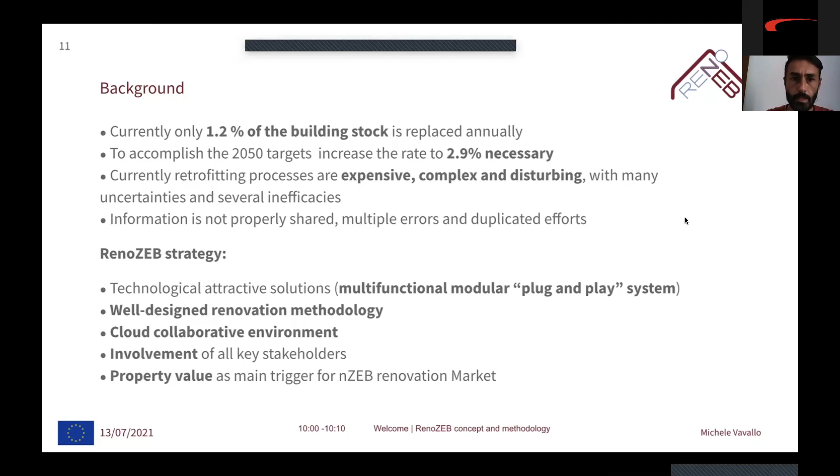The main objective is to unlock the renovation market in Europe, mainly for buildings from 60 to 80 years old — the biggest stock of building we have in Europe — which has to be revamped somehow, because we have a lot of energy losses there.

So we could gain a lot, we could improve the building in the end. To do that, we have worked on innovative components that we are going to introduce to you: innovative processes, decision-making methodology and mechanisms, and guidance for the value chain actors throughout the renovation process, from design and planning to manufacturing and maintenance.

To sum up, the four pillars of the project are: reducing energy consumption and increasing renewable energy; cost and risk reduction; decreasing disruption for the occupants in the building; improving and boosting replicability and adaptability through the modularity of the facade and the solution application; and considering the property value of the building as a trigger — increasing the value of the building is also one of the aspects considered in this project.

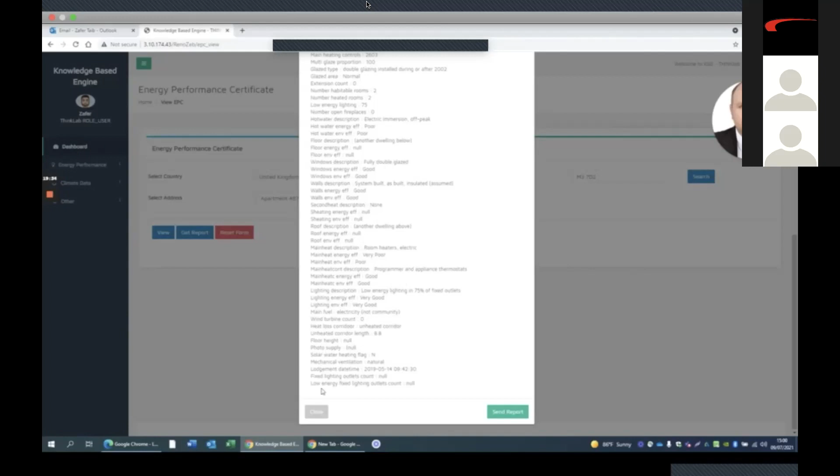Let's move it to EPC Band B. Property will be among 285 number of dwellings, and property value will be increased by 4.8%. Again, this data represents the UK only. The country-specific data and indicators are being developed for all countries across Europe. And if I click on Send Report, this will automatically be sent to my mailbox as well.

Coming back to the dashboard, similarly, with this function, the Energy Performance Analyzer, we can use it where we don't have any EPC registered with postcodes. In this case, we will be able to upgrade the database by providing our own data, and then we will be able to select the property types given for the exact area, and then we will be able to select the build forms like end terrace, mid terrace, enclosed mid terrace, semi-detached or detached, and so on.

And then we can input our own current EPC band, for example, let's say if it is C, and then we will press on Get Report, and it will make a comparison similarly to the one made in the UK example. It will compare our property with the neighboring buildings in that postcode, and it will give us an indication of a property value increase and among how many buildings our property is going to be indicated.

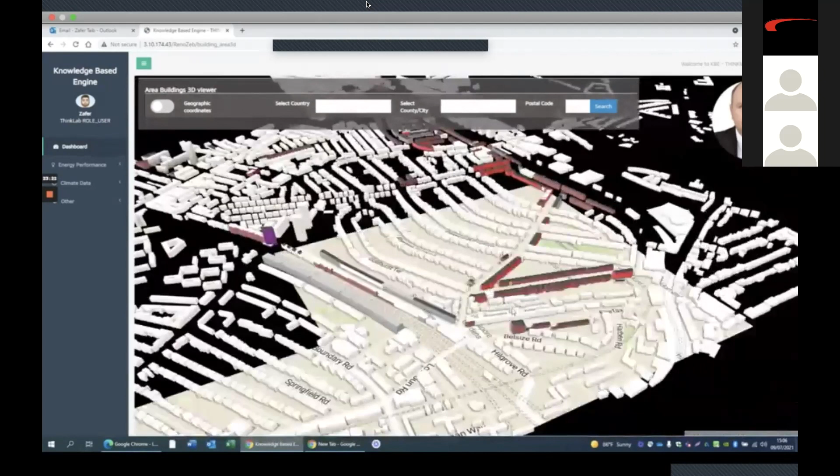Again, coming back to the dashboard to see our very final functionality, the area buildings 3D viewer. Again, we click on select. This is just a basic functionality that depicts the buildings in 3D view format for the selected property, and it depicts all the neighboring buildings. In this case, the building has been depicted in purple.

And we had elaborated all the functionalities of KBE in the dashboard. Similarly, let's check the final icon here, which is Area Viewer. It is the latest one, and when we click on the download user manuals, it is not readily available, but it will be there for sure for your usage by September. It will be depicting how you're going to upload your own data and the data format requirements.

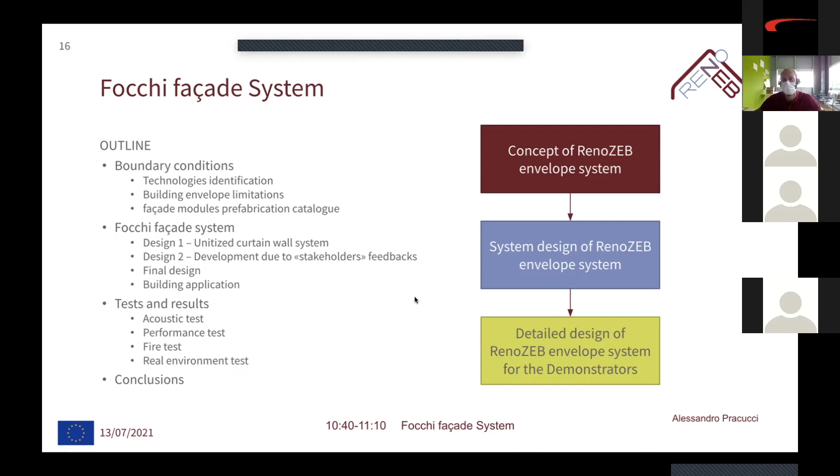What are the boundary conditions for the realization of this type of facade? First of all, we set up different technologies to be included. We wanted to realize a building envelope capable to integrate in an effective and efficient way different technologies. All these technologies were part of an ideal concept for deep retrofitting.

So including insulation, sensors, piping, windows, ventilated solutions for facade, and all those technologies that are now included in retrofitting scenarios, but for deeper renovation solutions. These technologies were included and integrated into a concept of facade.

This facade is considered a plug-and-play facade solution, capable of providing all these solutions directly on site in an easy and fast way for installation. The whole process was designed to be prefabricated off-site and then easily applied on-site, and then demonstrated in building applications to show the effectiveness of this solution.

This is the concept behind the RenoZEB facade. How did we decide to move forward? First of all, by focusing on the technologies.

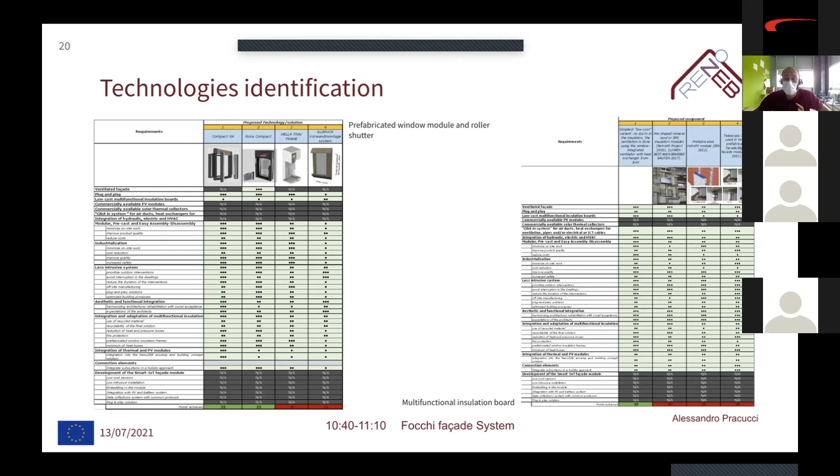This matrix was used for all the technologies mentioned, so for prefabricated window modules and roller shutters, and we figured out there were some specific technologies very valuable for our purpose. Then also for the insulation board, that is the integration of ventilation components within the facade, and in this case too we figured out that one solution was better than the other in achieving our requirements.

In the same way, we adopted this approach also for other components, for ventilation devices, as well as for building-integrated photovoltaics and related batteries. Finally, for building-integrated solar thermal, so how to provide heating water for building purposes, or hybrid solutions between BIPV and building-integrated solar thermal.

The final consideration after the evaluation of this matrix is synthesized here. We found out that these technologies were the ones useful to achieve the concept behind the RenoZEB plug-and-play facade, including a prefabricated window module with a specific product, and for the multifunction insulation board, we defined the best solution for our purpose, and so on for everything.

As you can find out, these are commercial products. It's nothing particularly new, but they are on-market technologies that we decided to integrate into a single solution.

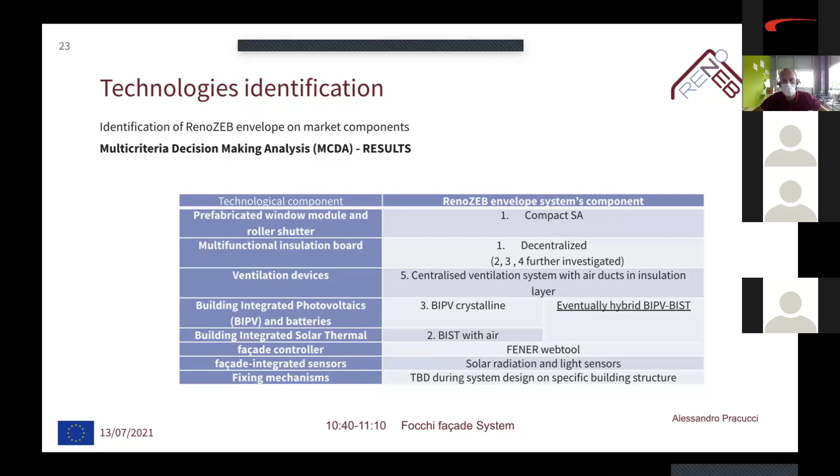The further step was to consider not only the technologies, but also what are the building envelope limitations for the application of this type of facade. In particular, we defined the boundary conditions for the existing stock, focusing on the two main demonstrators where we applied the RenoZEB facade to demonstrate the effectiveness of the solution.

In this scenario, the main components that represent boundary conditions for our design of this plug-and-play facade are mainly two: first, the structural part of the buildings, and the openings we have. The idea was to have a low intrusive solution, so as to not cause any particular issues to the people living inside the apartment, since these are components that cannot be changed.

With these two components very much in mind, and with the idea to not change anything, we designed the primary module, the one responsible for hosting the windows, the opening itself, and after this, all the other modules useful to integrate all the technologies such as BIPV or solar collectors, as well as to provide a solution for the opaque part.

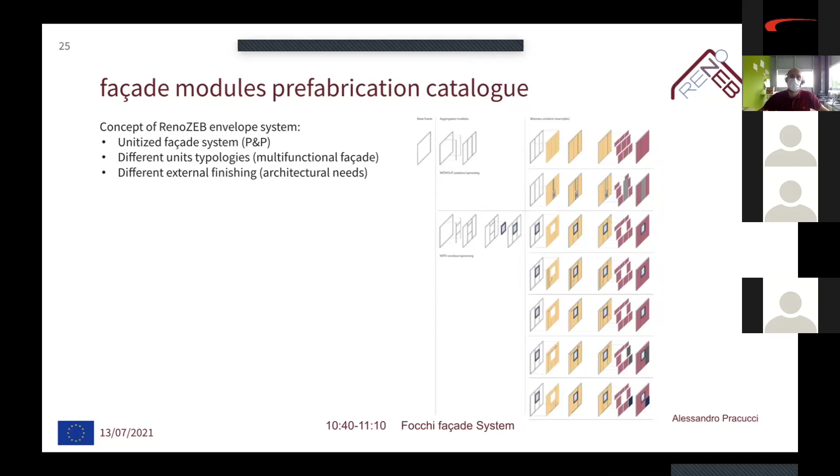With these considerations in mind, we went deep inside the Focchi facade system and the plug and play concept itself. What we designed was a prefabricated panel which adds an additional layer to the existing one. The existing wall remains the same, won't be touched by our intervention, and its presence guarantees that people inside the building can keep living inside the apartments without changing their life.

Then we have a cavity. This cavity is useful to host the bracket for installation of the prefabricated panel, as well as to increase the insulation properties of the overall renovated building. For example, in the Voru demonstrator, which you'll see in the next days, this cavity was a key element to achieve the lowest thermal transmittance target requested, useful for the purpose of having a nearly zero energy building.

For the RenoZEB prefabricated panel, the initial idea was to adopt the curtain wall facade standard, because we wanted to comply with norms and European codes to achieve certification, as well as to have a very high quality product for this type of product.

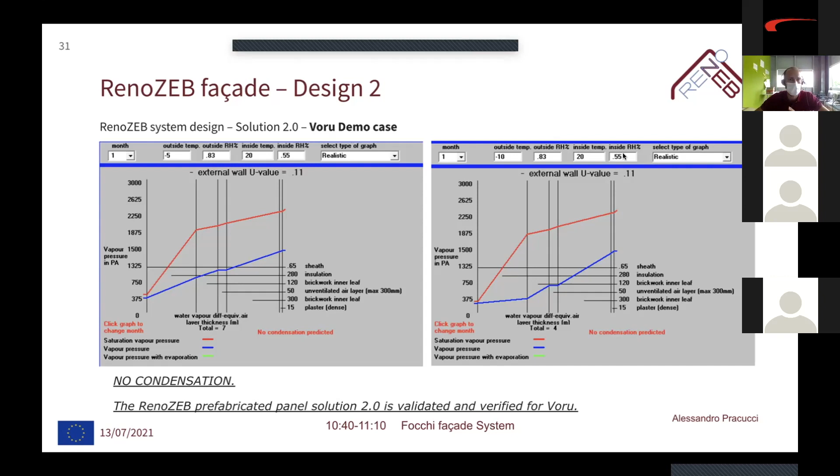The same was true for the Spanish demonstrator, the Durango demonstrator, situated in Durango. So we demonstrated that with this facade, we can achieve good results for the condensation issue both in conditions like the Spanish one and the Estonian one, which are very different for many reasons.

This is the final design, everything finalized based on all the considerations I've already presented: the ventilated facade, the membrane position, the mineral wool for insulation, the bracket design to be placed on site. This is the final design of the RenoZEB facade.

Obviously this is a node, a detail of the facade. After this, we define in more detail all the unit typologies. So first of all, the opaque unit.

The opaque unit is completely opaque, so it's installed directly on the brackets positioned on the load-bearing structure of the building, and it guarantees to cover the opaque part of the existing building.

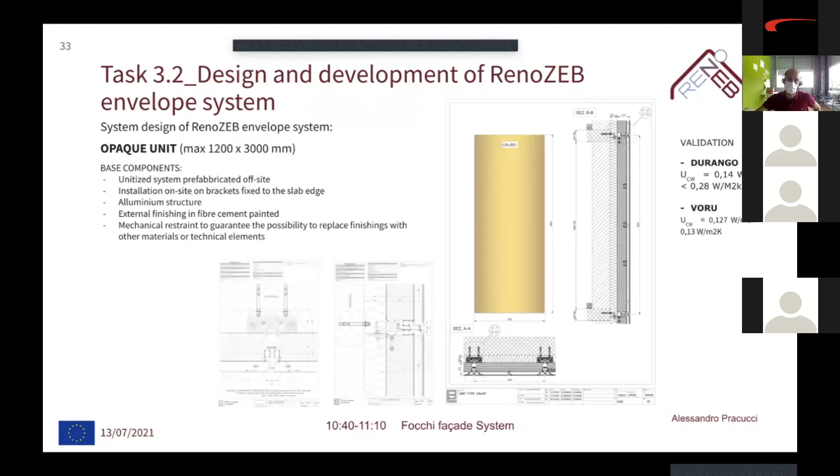On the right you can see the result achieved for Durango. On the right you can see the thermal transmittance achieved in the two demonstrators compared with the target expected by the norms. We comply both in the Durango demonstrator as well as in Voru with the requested norm, demonstrating the effectiveness of the solution. The difference you see between Durango and Voru in thermal transmittance depends on the existing wall. The existing wall is included in the thermal transmittance calculation, and it contributes to achieving the final result.

The other unit typologies - these external finishings are for the opaque unit, but also apply to the other unit typologies I'm going to show you. So we can include cement board, wood, fiber cement, porcelain tile, and so on with different finishes. Obviously these are all on-market solutions.

The other unit typologies include the window unit with window and roller shutter included. This guarantees to maintain the same opening, working only inside the intrados to absorb tolerances that can exist in an existing building, different from the precise prefabricated solution we have. On the right you can see the thermal transmittance achieved. This is the monoblock and roller shutter solution included in the facade.

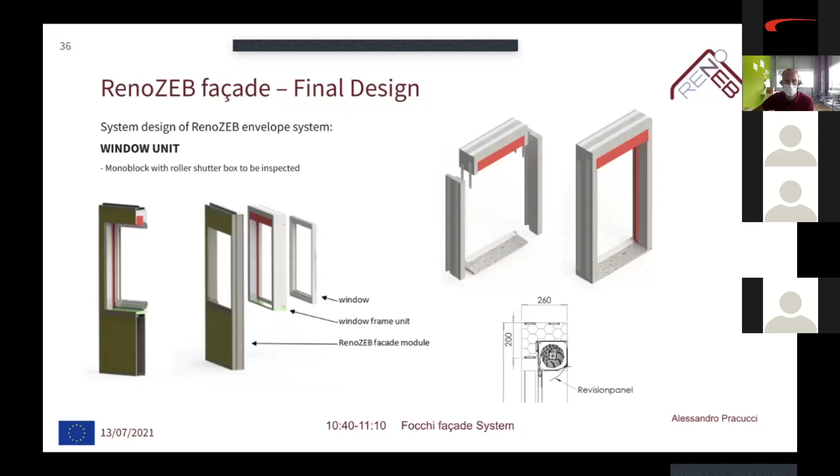Also included in this window unit are some sensors that can be used to manage the roller shutters, for managing internal comfort and energy efficiency in general. This has been developed inside the project in partnership with Università Politecnica delle Marche and Fraunhofer, in addition to Focchi facade.

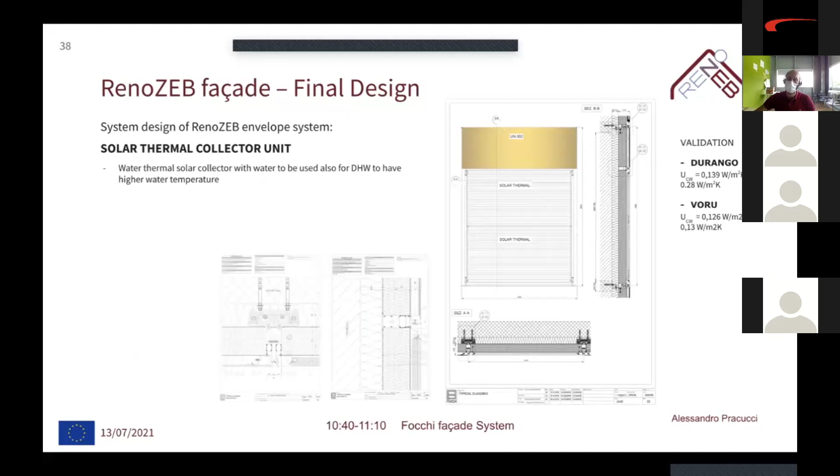The other unit typologies are the solar thermal collector units. Here we include a solar collector, which I'll show applied in one of the demonstrators, the Spanish one. There's also the photovoltaic unit, including on-market product. Here the dimension depends on the product, more or less around 1 meter for the unit, and this is for photovoltaic.

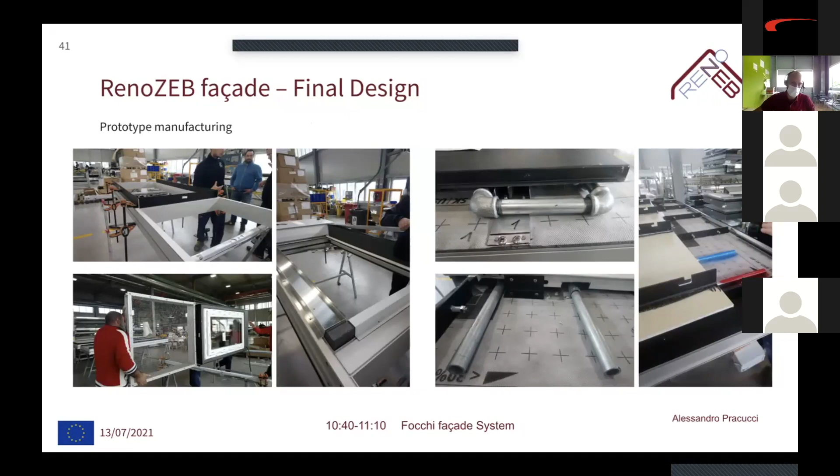This is the prototyping of the facade, a visual prototype, the very first prototype. Some change occurred during the final manufacturing, but more or less this is how it works, the prefabrication itself with the different phases and the positioning of the panel.

Here are some activities by our staff during the prototyping, manufacturing and installation. You can see both our prototyping team and designing team validating the solution.

And here you can see some units: the opaque unit with wood or porcelain tile, the window unit, but also the photovoltaic or solar collector unit.

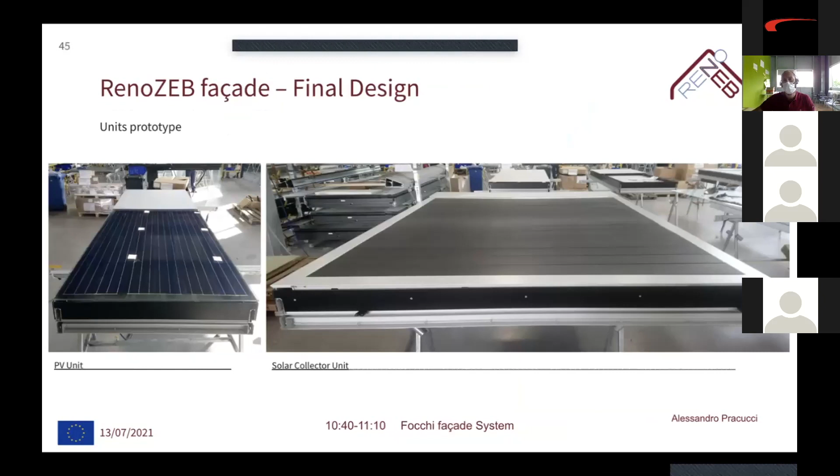In this picture, you see the installation procedure. We simulated in this first prototype an existing wall. We position the bracket, we pick up the unit, and install the unit.

The result is this one. This is a visual mockup we have here in our facility with the different units, and you can see the layerings we have in the facade. In the gray part here, this is the existing wall. There is the cavity filled with insulation and the prefabricated panel.

On the right, the intrados for the windows. As you can see, there are different solutions we can provide with different finishing, and so different integration possible.

The test and results. I'm going to show briefly the results of the test. We conducted different activities for thermal behavior, heat bridges, acoustic insulation, water tightness, and wind load resistance of the facade, but also reaction to fire.

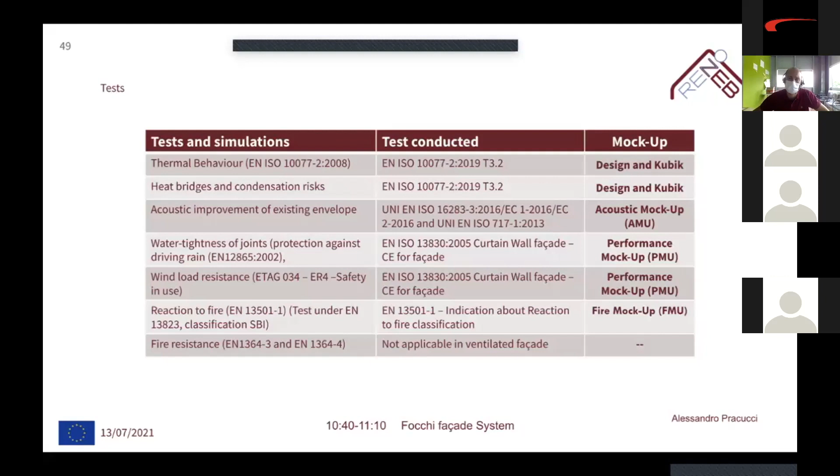First of all, I'm going to show you the acoustic activities. There were activities conducted for acoustic insulation performance under the specific test for airborne insulation. No flanking was done because there were the existing facade working for this.

To compare the different facade, we designed the acoustic test using a sort of simulation of existing wall, a one brick wall, to simulate the existing facade. This is the test. Three configurations were tested: the existing building envelope only, so the one brick wall, just to have a sort of benchmark for the existing wall.

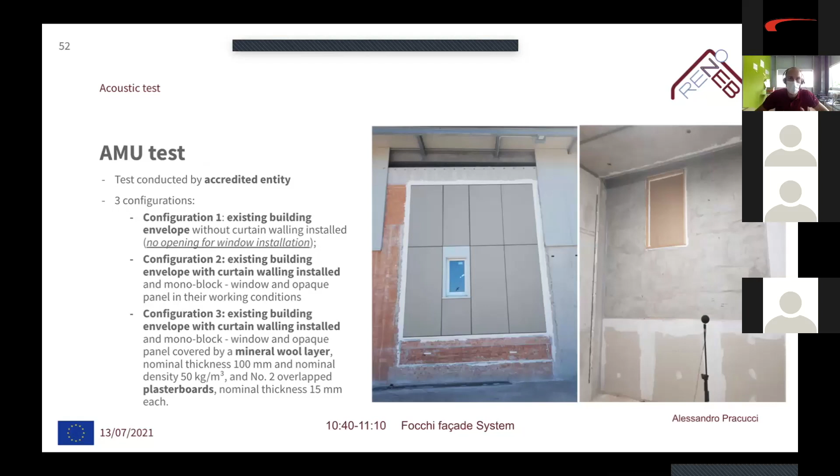Then we test configuration 2, so the existing building plus the curtain wall installed, and the third configuration is the existing building plus the curtain wall installed but closing the opening itself, because obviously in the first wall there were no openings, just to have a benchmark with only wall. But this would cause some issues in the acoustic test, so we try to compare configuration 1 and configuration 3 to have similar and comparable results.

The result demonstrates the effectiveness of the solution. So the reference you can see is configuration 1 and 3. Considering no openings, we can improve the facade itself. Configuration 2 demonstrates the effectiveness solution, but differently from configuration 1, we have an opening.

We included an additional test - if we had done the same also in configuration 0, so a brick wall with an opening, the decibel of insulation would be much lower than 40 decibels, and so we achieve a very good result for improvement of acoustic insulation.

The other relevant test was the performance mockup. So we went to an accredited test chamber for the test, and we designed the test to comply with all the unit topology we had and to test for all possible applications in demonstrators.

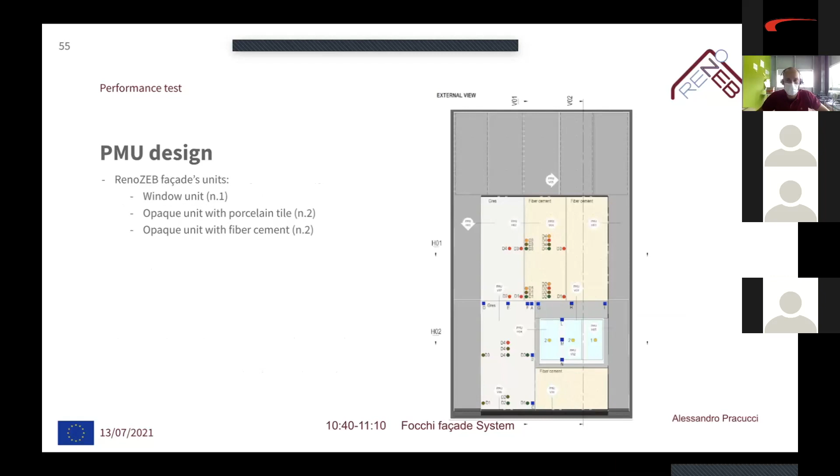Different activities were included in the method statement of this test: air permeability, water tightness, wind resistance, but also impact on different finishing.

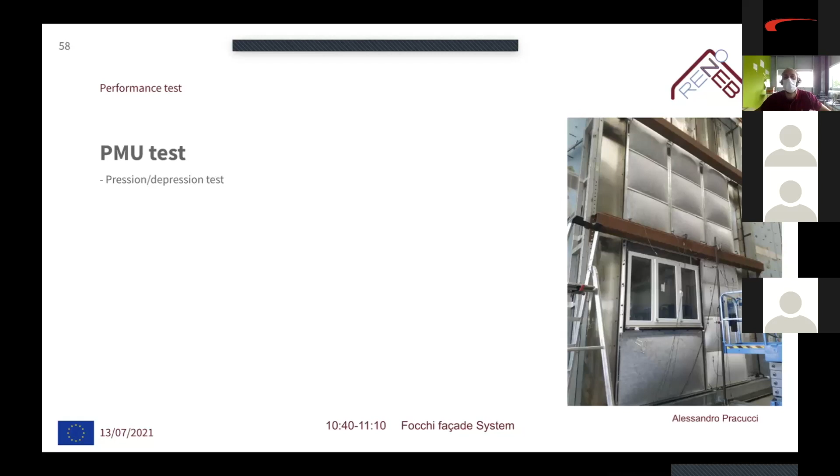This is the test itself, the installation, but also some specific parts of the test. This is the depression test. As you can see, the membranes move out in this case because it was positive pressure, but in the pressure case, they were on the other side.

These are impact tests, both in external finishing but also in windows. So we test both the material, but also the interface we design and manufacturing inside the facade.

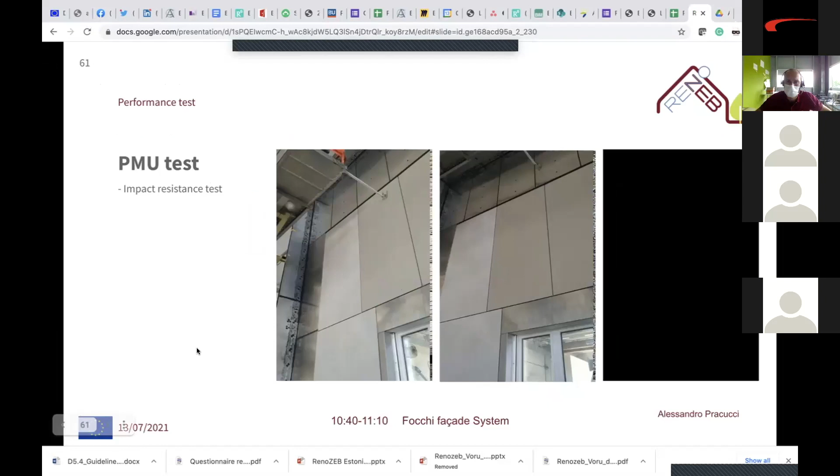Here you can see another test conducted during the validation activities. Just to give you the idea about the... okay, I get back to the presentation. There were some videos, but I cannot show you now.

Here the results. We had everything accredited by an external entity, so the results here were in line with our expectation. We designed an innovative facade solution tested for the curtain wall facade norm, so very effective for the market. We demonstrated the safety of the solution, and we could achieve also the certification itself of the facade.

For what concerns the fire mockup, this is something not included at this moment in certification of curtain wall facade, but we wanted to understand the behavior of the facade.

So we tested in SBI test the facade where there is air inside the overall building envelope of the new building. We test the external side of the RenoZEB facade, the ventilated cavities to the internal of RenoZEB panel, and from cavity between the panel and the existing wall to the RenoZEB panel itself.

The other additional two tests could be conducted, but they would have tested only the external finishing, so not something developed within the project, or the existing wall, and we cannot work on the existing wall.

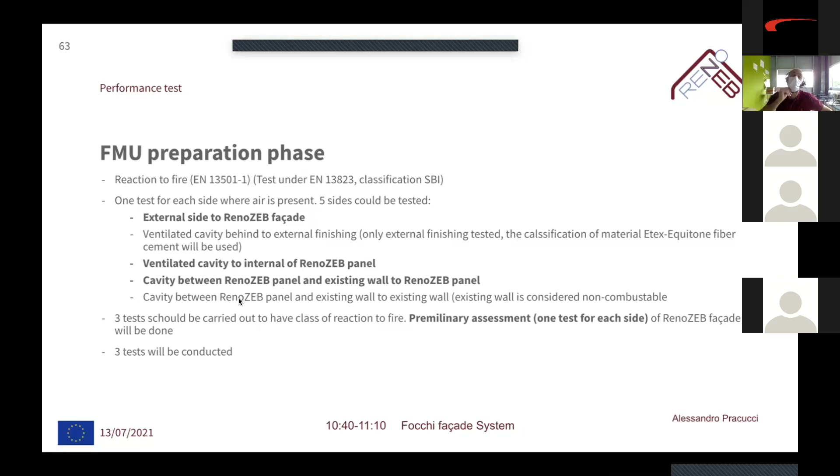The tests were designed in these three configurations: from external side to RenoZEB facade, from ventilated cavity to internal RenoZEB panel, and from the cavity between the RenoZEB panel and the existing wall, and the RenoZEB panel itself.

Here the test: the SBI test is a small furnace that achieves temperatures of 300-350 degrees. We tested everything, and the results were quite positive considering the different materials we used. There were some issues related to the design of the test itself, but generally speaking, we can guarantee a facade that

is in line with external finishing. So we use, from outside to inside, an external finishing in class A. We can achieve a class A. Otherwise, obviously, if you want something good, class E is the one used, but it depends on the external finish

you want to use. We can protect with this external finishing class A the internal layer that can have some issues because they are plastic membranes. At this moment, we are working on implementation of this solution using some innovative membrane in class A or B that can be valuable to have a higher classification for reaction to fire.

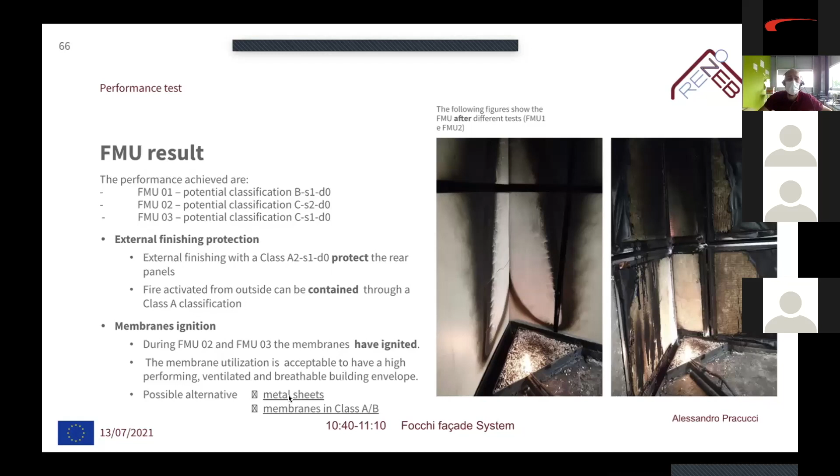The alternative is to use metal sheets for the facade itself, and we won't have any problem with reaction to fire. So it's a valuable alternative.

Other tests were done inside KUBIK in Tecnalia, Spain. So all the installation process was validated and confirmed, was used also for training, and the energy performance

were validated. Just to give you the last part of this project: on the basis of the existing building and the survey conducted, the design of the RenoZEB facade is conducted, and then a detailed design for the RenoZEB facade system is done, including all the shop drawings useful for the procurement phase, for the installation in our facility, so to have everything

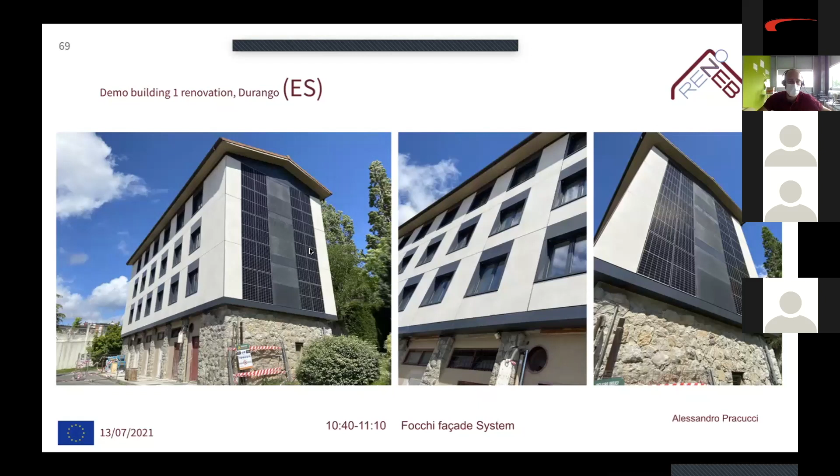in an industrial way. This is the result for the Spanish building. As you can see, it's quite valuable from our side. Very beautiful building, with very high performance and with different solutions. Here you can see the opaque typologies of the facade, the windows facade, but also photovoltaic and solar collector.

Conclusions: the plug-and-play facade is a valuable technology solution able to integrate different solutions for deep retrofitting. It can be customized, so this is very valuable using products on the market; can provide high quality due to off-site prefabrication that guarantees more precision and very tight tolerances; can guarantee aesthetic and functional integration

during on-site activities. Once the people on site understood how to work the curtain wall facade, it's very easy and time-saving, the installation itself. The disturbance to people inside the building is very low, only few problems during site activity, because all the renovation activity is done from outside.

It can be adapted to different climate conditions, building tolerance or energy needs. And generally speaking, it's a curtain wall facade that demonstrates effectiveness for building renovation. That's all, thank you.

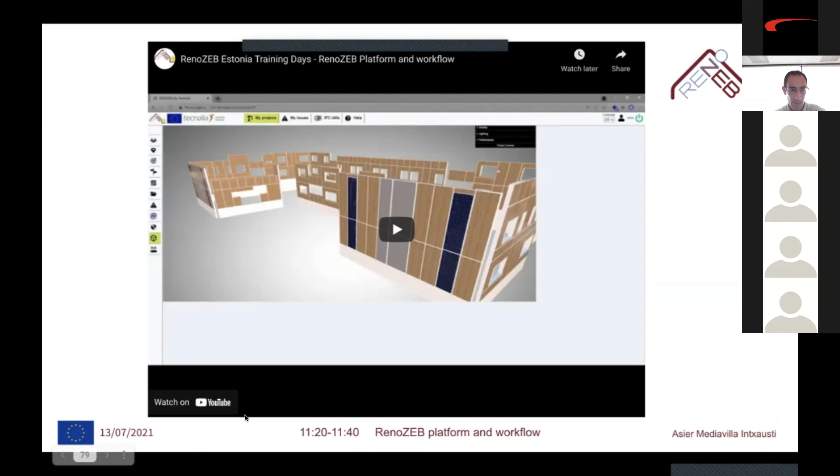Okay, can I move the slides myself? Yes, you can move yourself. Can you control it? Yes, I am. Is it okay for you? Okay, yes, sorry, I see the control now. Yeah. But it's going a little bit slow. Okay, yeah, it's late, okay. Sorry for the delay, let's hope that it works.

So hello everyone, I'm Asier Mediavilla from Tecnalia, and I'm going to present the developments done in the RenoZEB platform and the associated collaboration workflow.

Let's move on. The idea behind this is that the energy renovation process is a very complex process, so there are a lot of stakeholders participating in different phases. Already in the RenoZEB project, there was a decision-making methodology developed that provides a way for different actors to collaborate and make decisions taken on each of the different phases. So the collaboration platform can be seen as the backbone where different actors collaborate. On the left we can see a timeline view with plan, design, construction, and different phases, showing how different actors can share information, make decisions, and use the platform for decision making.

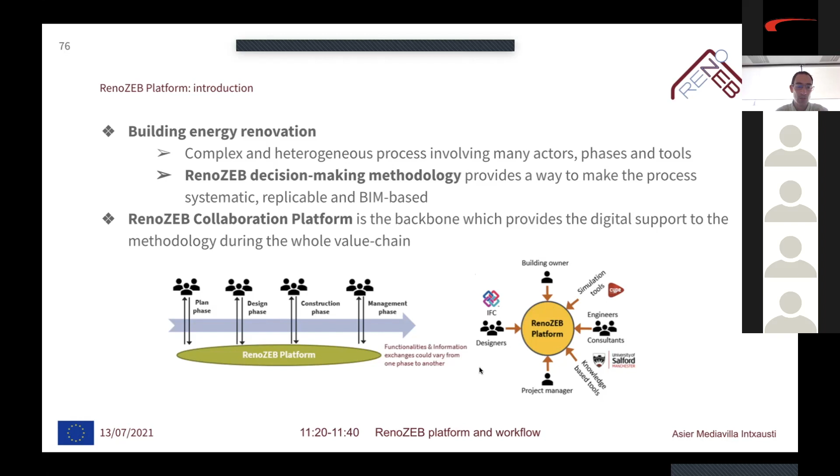So the core concept of the platform is the BIM. We can see the BIM as a process, as a verb, where different actors collaborate in the process and can share information, share issues, assign tasks to one another, or even define different scenarios or alternatives with some KPIs taken from different tools used in the project or from external tools, and then make rankings of different scenarios, which is better, which performs better according to some user-defined criteria. We will see this afterwards in a demo.

On the right-hand side, you can see that the BIM can also be seen as the data model of the project with all the related information. We support visualizing the BIM models in a web viewer, and also making different queries and filtering the data by providing different thematic views and color charts, or even visualizing different BIM formats—the IFC model, also the final render, as you can see on the left-hand side—and also connecting external tools, as we are going to see in a short demo with Cype tools.

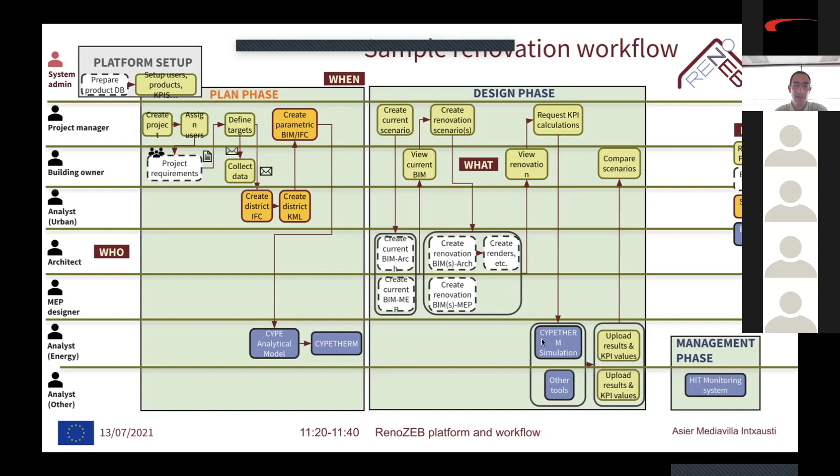So I have no more slides for the moment, so the best thing is to watch it in action.

We will see first how you have different users. If you log in as an administrator, you can handle all the users in the platform, create new users, assign them a role into the platform, and so on.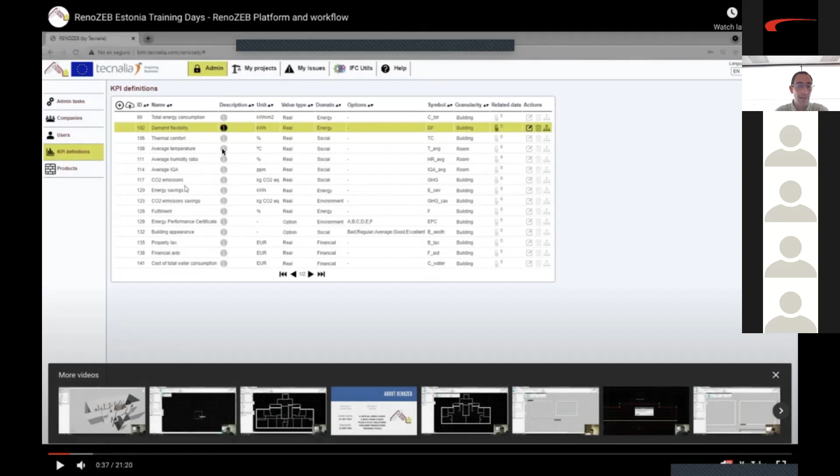Let's move on. You also have all the KPIs that are defined in the project. The platform lets you define or manage a dictionary of KPIs. These built-in KPIs are the ones defined in the RenoZEB project that are used for decision making.

You can select one KPI, edit it, or even create a new one. We can see here how to edit or assign the information of the KPI, for example the domain, energy, environment, the type of unit, the value, and whether it is applicable to the whole building. You could even associate documentation or related information to the KPI.

Let's move on a little bit. Now we also support a hierarchy of KPIs. For example, for the energy KPI, we are creating the total heating, which is a child KPI. You see the first one has an arrow that if you click, you see the hierarchy behind. So energy can be split, for example, into total heating, cooling, and so on.

You can do this for all the information in the platform, supporting this kind of hierarchy. You can also see that there are some KPIs that are not numeric, but are, for example, a list of values like the energy performance certificate, which can have values like A, B, C, D, or the building appearance, which you can define as a collection of values like bad, good, regular, excellent, and so on. So it's not only that you can compare numeric information, but also more qualitative information.

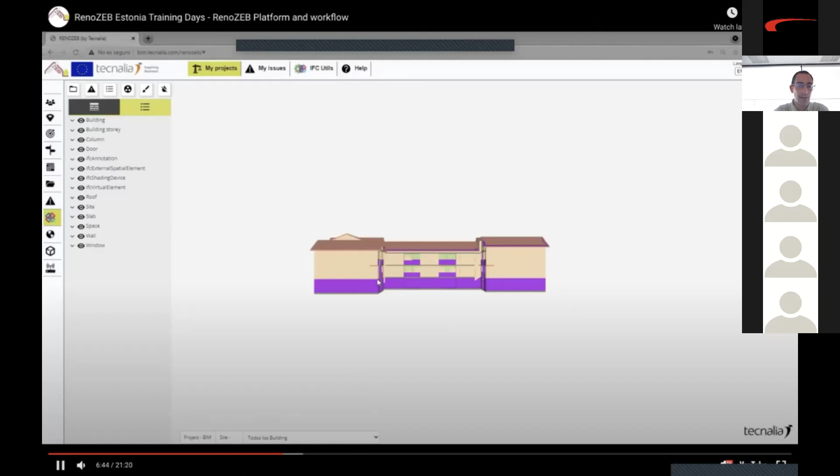So this is a file, a PDF, the plan of the building. Now one of the files is a BIM file. When you upload a BIM file, there is a particular icon that tells you that this is a BIM file, and if you click on it, automatically you can visualize the model in the viewer.

It gives you the options to select what elements to see or to hide. Perhaps you have already worked with some BIM models, but this one is based on free technologies, and you can view it on the website and integrate it on a custom application.

One of the functionalities we also provide, let's move on.

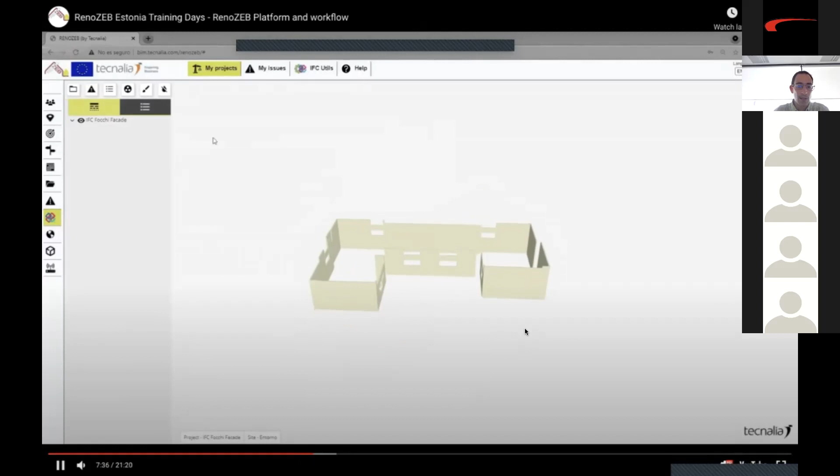Now we are also seeing the BIM model of the renovation project, the Focchi facade developed by Focchi. This is the view, not the render we are going to see right now, but as you can see, you can combine different BIM models in the viewer.

So we can see, for example, the building before and after, using these two icons on the left.

Also, we support a viewer for the GLTF format, which is a rendering format that in this case has also been created by Cype, and we have developed the viewer so it can be seen online, for example, to share with the client.

We could also create a rendering where you have the original building and this rendering attached, so that you can compare how it's going to look.

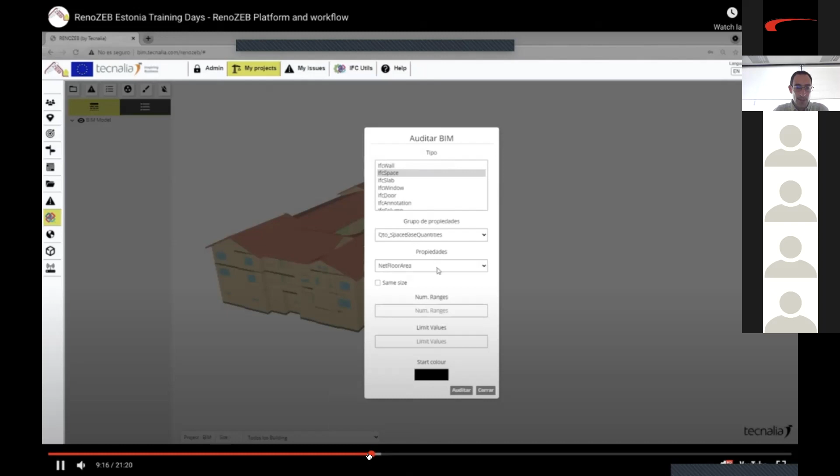Let's move on a little bit. On the right hand side, when you click an element, you can see all the information on the right hand side panel.

And well, this is the query or auditing functionality. You can select a property in the BIM model and color it according to a property, in this case the area of a room, and you can select the ranges and colors you want to display.

That could be very useful if you link the information of each room or element with energy consumption or other energy related data. We could automatically display this information, or even have two coloring displays, one for consumption after and one before, for example.

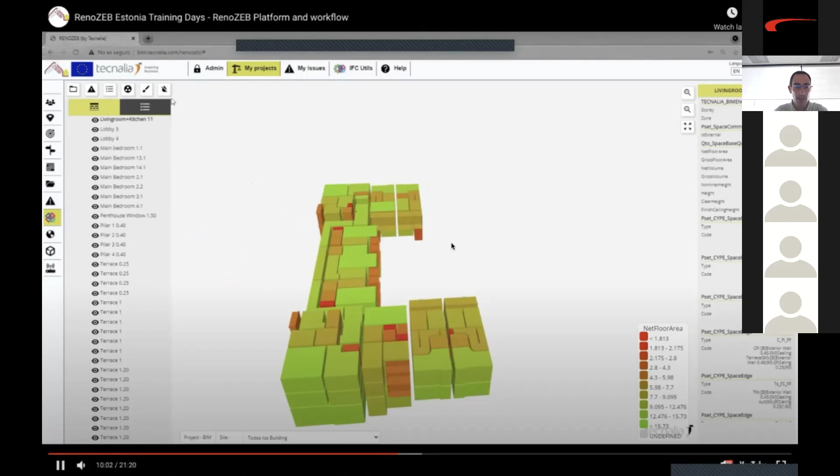We also have the functionality for filtering the information. For example, in this case we are filtering, or asking the platform to provide us which spaces have a floor area higher than a certain value, for example higher than 20 square meters. Then these elements are highlighted in the model.

We could do the same with energy consumption or with other relevant information important for decision making. We could make filters and see which elements fulfill this information, or put elements in red and green depending on whether they fulfill the criteria applied.

What we are seeing now is the scenario management, or let's say the KPI comparison tool. You can create different scenarios. For example, imagine you want to compare the current situation of the building with two or three different alternatives.

One alternative could be to put the Focchi facade with some solar panels for hot water or solar collectors, or another alternative could be a different type of solution. So you could create different folders, different scenarios for these alternatives.

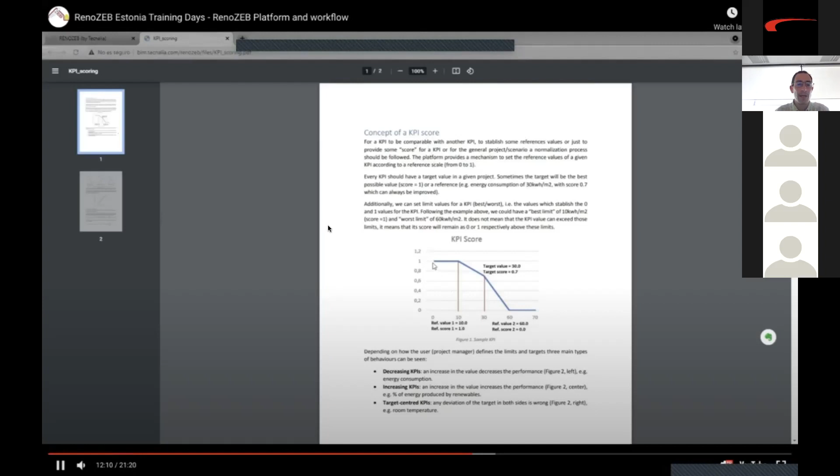Now the user, that could be the building owner or someone acting on his behalf, selects with a checkbox the different KPIs that are applicable and gives these KPIs a score. For example, you have to tell which KPI values are scored as 0 and 1, so basically you are telling the application the different values for these blue shapes.

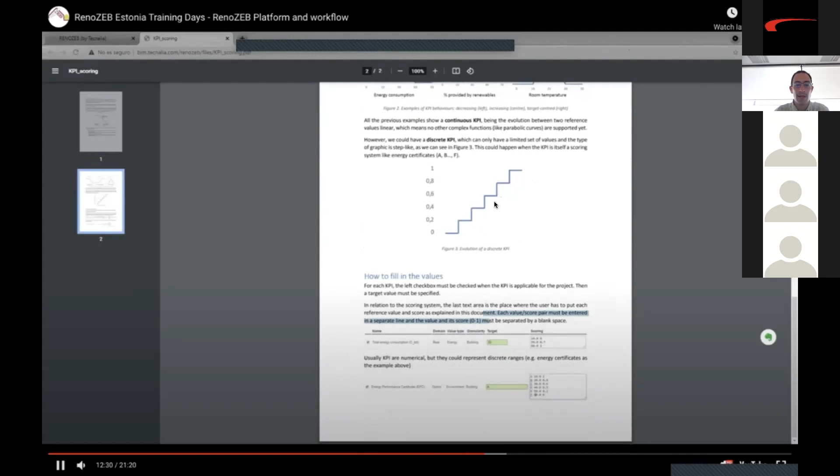So you can have KPIs that are increasing. For example, energy reduction, the higher is better, but energy consumption, the higher is worse. And comfort temperatures have some central good value and then bad values at the extreme points.

So all this information you are defining into this text box on the right. For each value, you give this value and a score, and in the green box in the middle, you put the target or your reference value. For example, my target is 100 in CO2 emissions, or 30 kilowatt hours per square meter.

Also, we can see here how you can put values to, for example, the appearance. We can see that bad appearance is 0, excellent is 1, and all the values in between. Of course, these kinds of KPIs are very subjective, and it's very difficult to define for a given scenario what is bad and good. But in the case of energy, it's more straightforward.

It comes from a simulation or a tool, so it's more of an accepted value. Now we have defined the KPIs, but we don't have the real values for these scenarios yet.

Ideally, we also provide an API for external tools to automatically take these models, make the calculations, and upload their values from a plugin or another tool. But for this presentation, we can also do it manually. You can click on edit and edit the different values manually, and once all the values are entered, you can already compare.

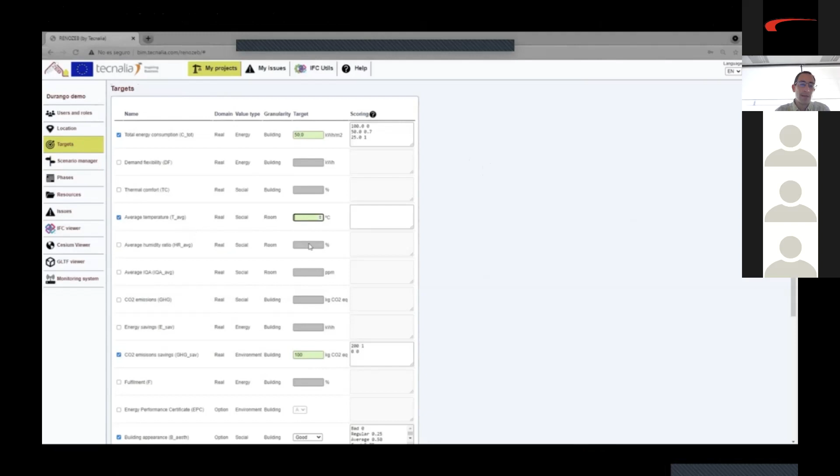Now, for example, we are telling the platform that we want to compare an additional KPI not foreseen before, and we will also create an additional scenario not foreseen before. Since we don't have values, we see this red line telling us that there are no values calculated yet. The same with the scenario.

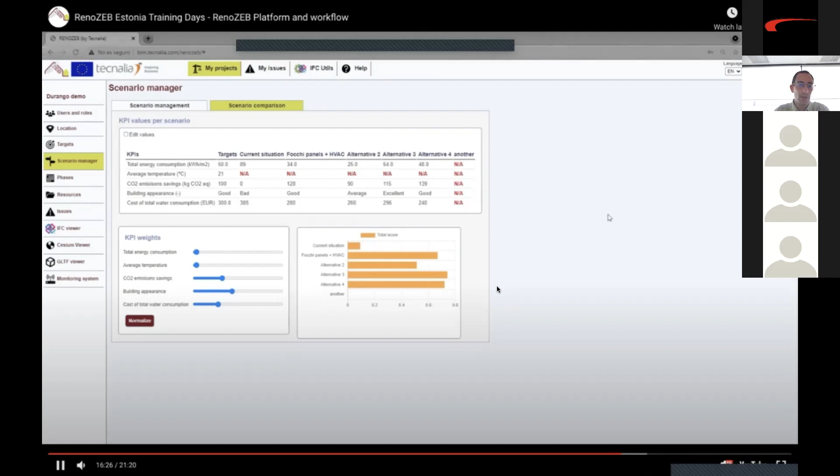If we create a new scenario, of course, we will not have values calculated yet, and in the comparison chart we will have a lot of red marks. So this scenario in particular will not be part of the comparison below, but you can just click as before and create all the values. It's a very flexible way to create as many scenarios and as many KPIs as you wish, and to rank according to your priorities.

Now let's see different ways of integrating external tools. For example, when tools are web-based, like the monitoring system developed by another partner, Hypertech, in the RenoZEB project, we can embed or access it directly from our platform.

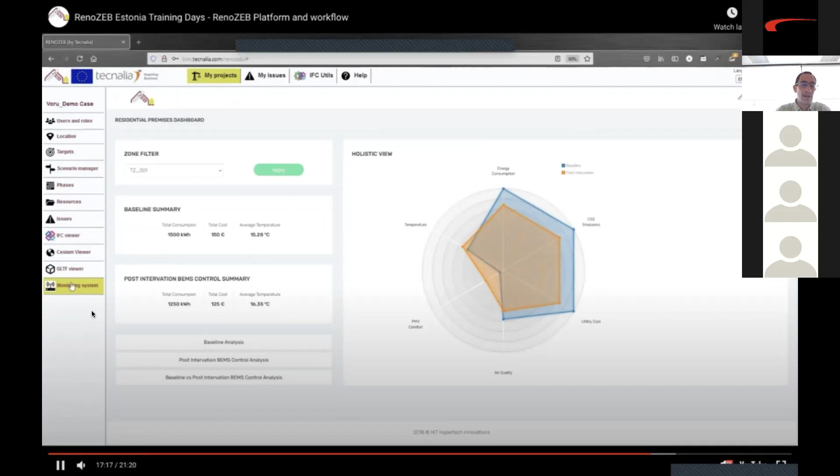We have a link on the left. You click there and you can access the monitoring tool developed in the project and all its functionality. From the platform, we can control which user can access which project's functionality, and it gives an integrated overview of the whole project because all the tools can be integrated.

Now I will show you a little demo of another tool we are working on in another European project, in which, at a very initial stage of the project, when you don't have the project model, you can create one from scratch.

Now we see, for example, this is Google Earth, where you can pick the dimensions or orientation of the building. And in the top bar of the platform, you see the IFC utils, where we have developed a very simplified parametric generator for a conceptual building mockup.

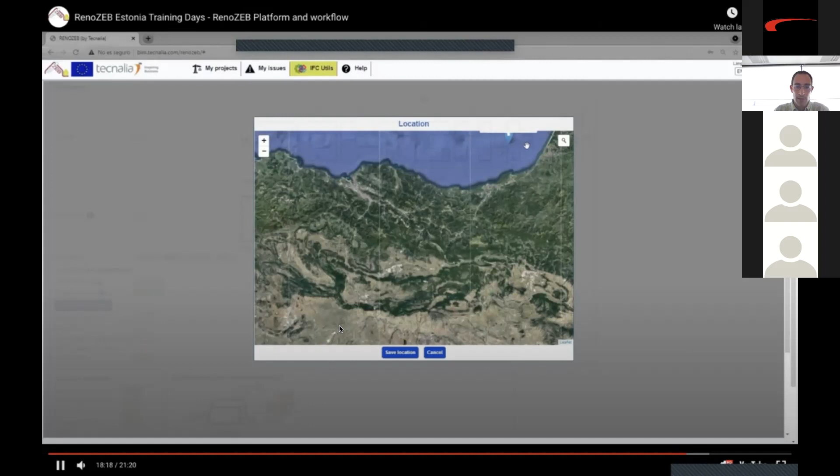For example, we are entering the data for the Voru building, which is like shape 5 here, and we enter the dimensions, the side lengths. We can also pick the location on the map. So we put Voru, and it finds the location automatically. We can select our geolocation, which is this one, the Voru building.

And also, when we don't yet have a district-scale model, we can put in some dimensions about which buildings are around ours. If we click, we can put the distance and height of the neighboring buildings as a conceptual shape.

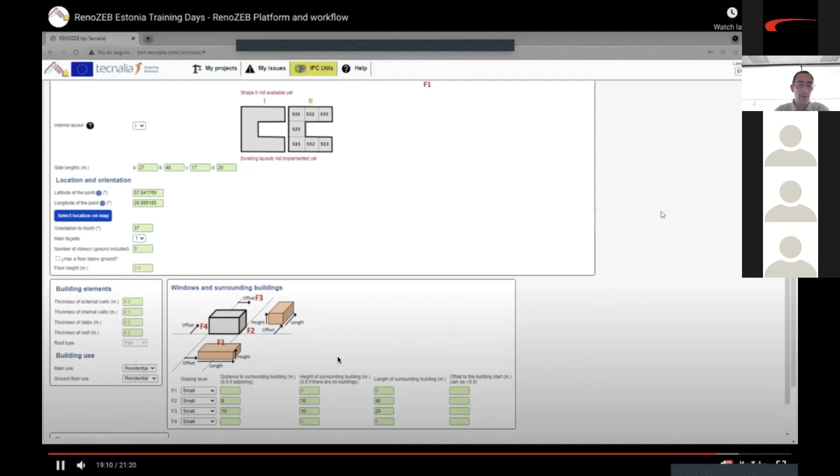And if we click on create, it's processing. So we can also create a reference view as a KML format. And once it's done, we can see directly from Google Earth, as a proof of concept, that the building has been created in its proper location.

But we can also offer a different option from the platform: we can upload the created information into the platform, both the IFC and the georeference model, and all the information is visual in the platform and can be used by external tools, for example, for performing a conceptual energy simulation or whatever.

Now we are adding this information into the platform, and we can see it in the BIM viewer. So this is the conceptual model created. We can perform the same functionalities as before, querying the building or providing colors according to the area of the wall, or whichever property.

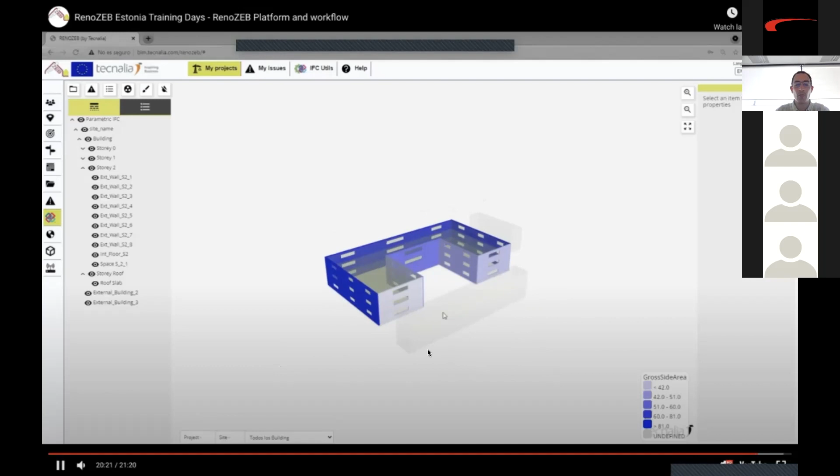And we can also see the geolocated view with a georeference viewer.

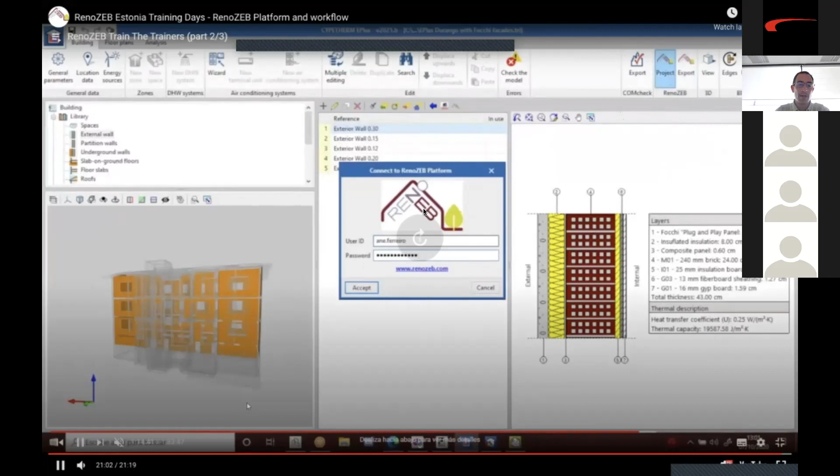Finally, we are seeing how to integrate external tools. Cype has developed a plugin. You see here at the top some icons, project and so on. You click there, and right now from Cype tools we are connecting with a username to the platform, and the user can see all the projects where he or she has been invited, with all the information, BIM models, and so on. These can be directly accessed from external tools, in this case Cype tools, and uploaded back into the platform or even used for calculations.

And I think that was the last part. So basically the summary of all this is that the platform can be an integration point both for user collaboration, so different users access different information from different projects, and also from a software tools perspective, different tools can connect to the platform and be embedded into it to provide enhanced functionalities.

Our next challenge with the platform is to provide mechanisms for automating all these data transformation processes, so that you can automatically convert a GIS model to an IFC, or from an IFC automatically generate renders or district-scale information—aspects that have been demonstrated here manually, to be able to do in an automatic way.

Well, and that was everything. So thank you all. Any question you have, you can just raise your hand, or I could also provide my email and you can ask me afterwards.

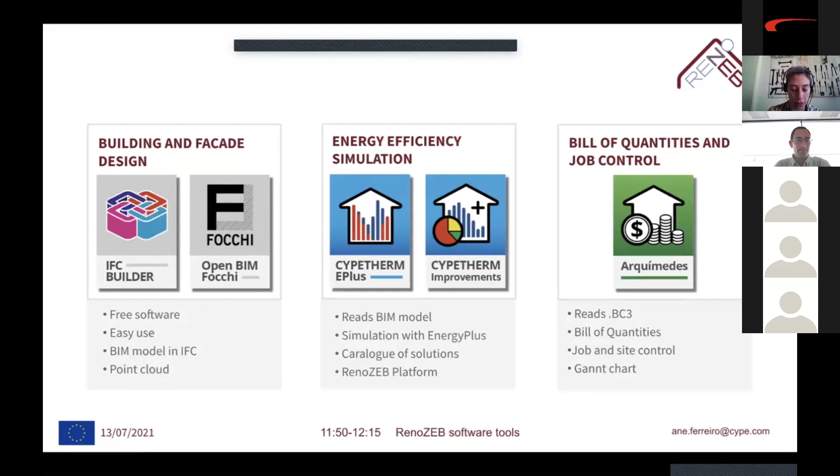This BIM model, with the IFC Builder software, is also capable of reading point clouds. So an important part of this project has been to scan these buildings and then put these point clouds inside the software to create as reliable a model as possible.

For example, in the energy efficiency simulation, CYPETHERM EPlus is capable of simulating with the EnergyPlus engine, and you will have a catalog of solutions that will help you address this renovation easily.

And the same for bill of quantities and Arquímedes. It reads not only the BIM model but is also capable of reading BC3 format, which is a format for quantities. And here you will be able to do job and site control, Gantt charts, etc.

Okay, what is the workflow of this process? First of all, the architect, or even an engineer, could do this BIM model with IFC Builder. IFC Builder is capable of sending the BIM model, or the information of the BIM model, to OpenBIM Focchi Facades.

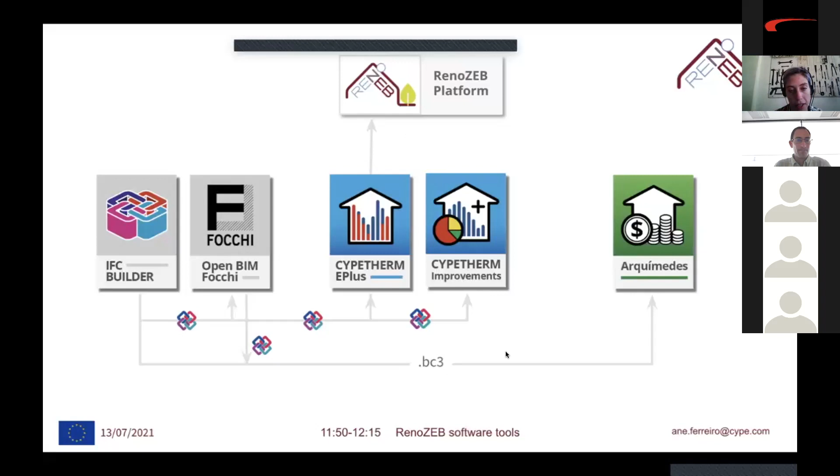This can also be done at the RenoZEB platform, and I think it's maybe more interesting than in CYPETHERM, but you also have this software to make the comparison. At the end, all this information will travel to Arquímedes, where you will be able to do the budgeting and job control of the construction site. Also, remember that CYPETHERM EPlus and CYPETHERM Improvements are connected to the RenoZEB platform, so you'll be able to upload and download information directly from the platform. So that's more or less the workflow.

And just for you to see, this is the Estonian demo case. You can scan the QR code if you want, and you'll be able to enter the BIM project of the Estonian demo case. This is a really interesting feature of Cype tools, because it enables you, for example, to share the information with your clients, or easily with other engineers, etc.

This Estonian demo case, as I said, has gone through various steps. First of all, we did this scan, this laser scanning, and with the laser scanning and the 2D plans, what we did was create a BIM model of the existing building.

Why was it so interesting to have the laser scanning? Because when you put the two together, the laser scanning and the 2D plans, you realize that sometimes reality doesn't fit exactly the plans that you have. So you can make a more accurate BIM model than only with the 2D plans we had in the past. Now you have the opportunity to make this comparison between both of them and be more precise, because you want to renovate this facade that is going to have really precise panels.

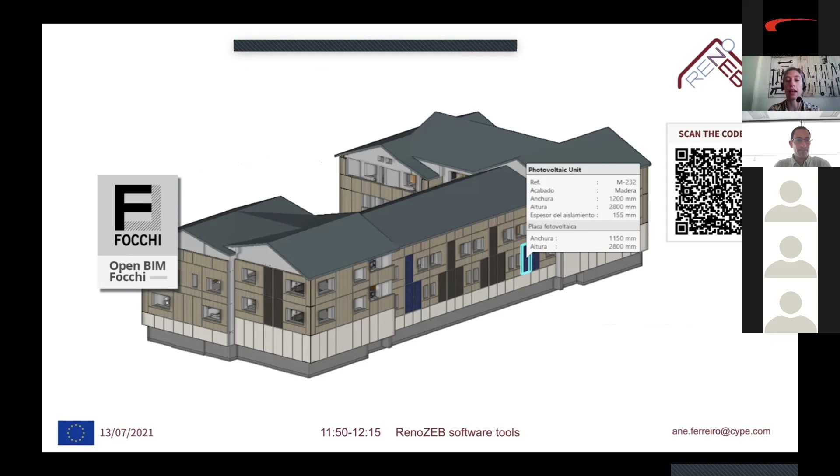So we have created the BIM model. After that, we used OpenBIM Focchi facades, and there we did a pre-design. I like to say it's a pre-design, because at the end Focchi does a big work designing the final facades, but this gives you an overview of how the facade is going to fit in the building, roughly what the price of this facade could be, and what the energy savings will be for this facade installation.

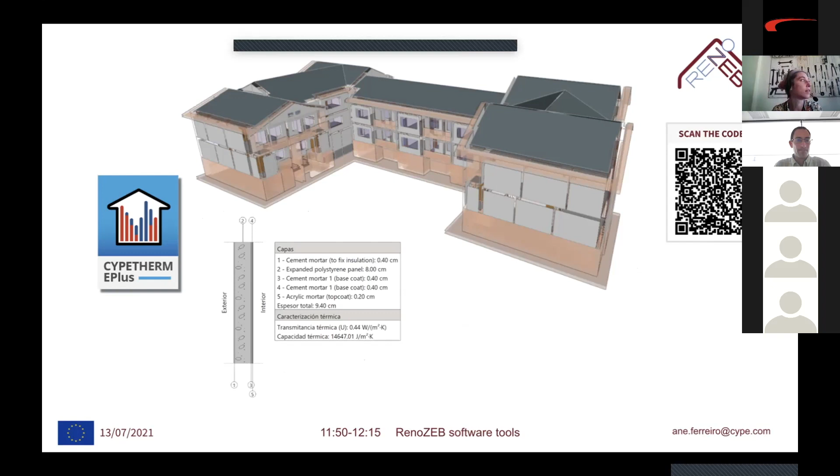And then at the end, we bring this BIM model, with the facade, to CYPETHERM EPlus, and there we made the simulations. Basically, what the program does is give a construction system for each of the elements of the building - the roof, the walls, the slabs, the HVAC systems, the water systems, etc. So it can simulate what the performance will be.

Again, here with CYPETHERM Improvements, you can see at the end the performance before and after renovation, and not only with the plug-and-play facade, but comparing with other solutions. Even with the same solution - okay, I have the Focchi facade, so let's add roof insulation - let's see if that performs well or not, or maybe it's not as necessary as it could be. And if you change the heating system, will it be better improved than if I put insulation in the roof, for example? So this program will allow us to see more or less what we are doing and which will be the better solution to choose among different performances.

And then you bring this information to Arquímedes. The programs I've shown you now - IFC Builder, OpenBIM Focchi Facade, and CYPETHERM - are quite easy to use and quite easy to learn. Then at the end we move to Arquímedes, and Arquímedes is a little bit more complex because it does a lot of things. It does everything from the bill of quantities to the construction site control. You have to add more information here, but it's still a really interesting program.

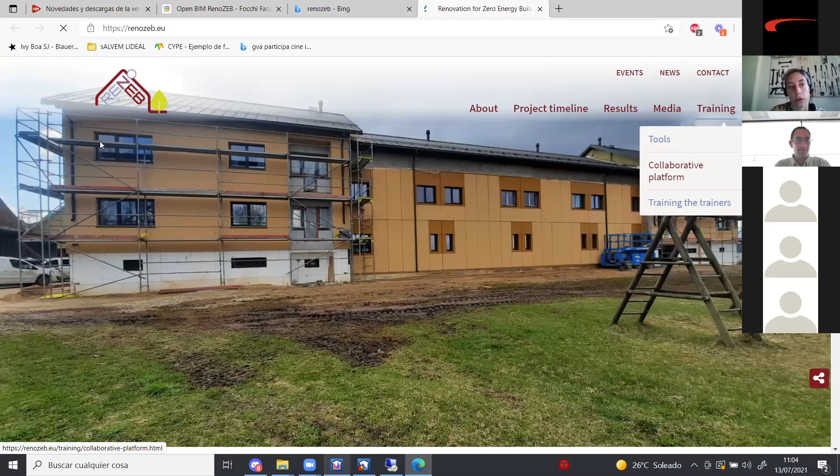I'm going to show you because I think it's interesting. In the case that you want to download the program, you go to training tools, and here you will have all the training tools, also the collaborative platform access. So here you can access, for example, IFC Builder, the tutorial on YouTube or Udemy.

I think the tutorial is really interesting. They are quite easy to follow, so if you want, please download the program and access the tutorials and see if that fits for your renovation process. Okay, so that said, I'm going to briefly show you the different software.

I'm going to start with IFC Builder. IFC Builder is really, if you are not aware of BIM or if you are not inside of BIM, let's say, it's a really easy program to use. I will say it's a really good program to enter BIM.

Maybe it's not the bigger program or the program with more capabilities, as it could be Revit, Archicad, Allplan, even though we have another more advanced BIM modeler called Cype Architecture that is also free. But I think it's really interesting also for engineers that maybe don't have that 3D modeling experience, or they don't know how to model in 3D, let's say.

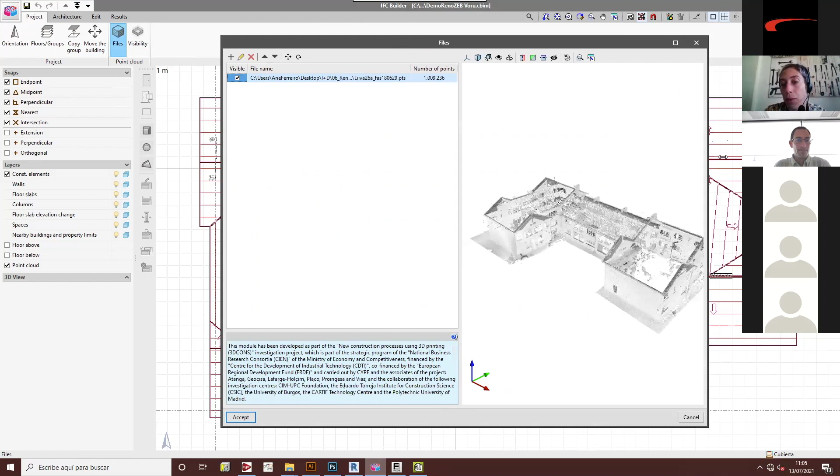And what we have basically done here is two things. First of all, we have entered two types of data here to create the renovation model: the point cloud data. You can see here the building in the point cloud, okay? And the 2D floor plans also of the building, here.

Let's open this, this is P2, okay? Let's go to the P2 floor and let's open P1, okay, yeah, it's open. So basically you have these two information data to work with.

And what you are going to do here is a really simple program. You have walls, you have floor slabs, you have openings. So basically you are going to start developing this model in 2D. Here you have the 3D view. I say this program is really easy to use because it's a 2D program that creates 3D models. So for people more related with AutoCAD, let's say, it will be a first step between 2D modeling and 3D modeling, an in-between step.

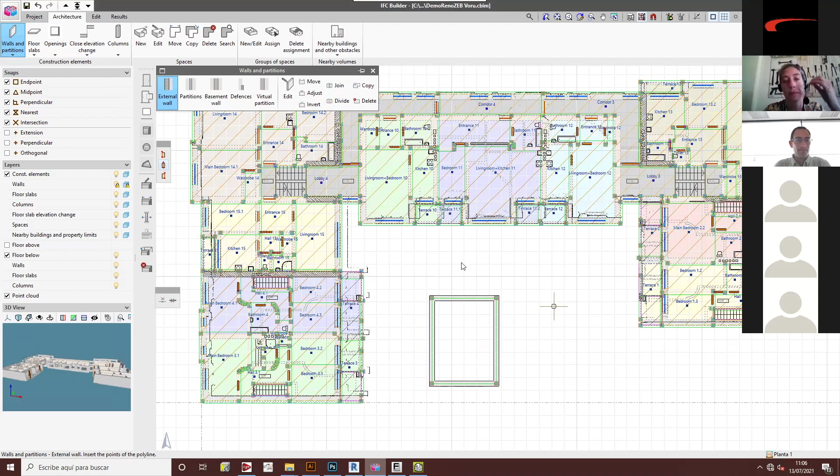So really easy, I create a type of wall. I already have my type of wall created here, and I just introduce the information really easily. And this way we are going to be able to do this project. I don't know what happened. Okay, after that, you export to the next program.

Once I have already my 3D model done, what I want to do now is create this facade, or see how this facade is going to perform. So I come here, I'm going to delete a little bit.

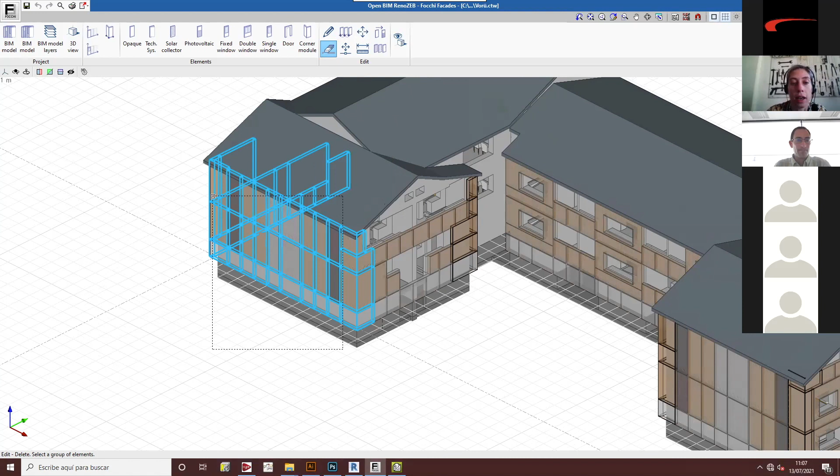I'm going to show you really briefly each of the software. You will have again the information or tutorials on YouTube and Udemy, so if you really want to learn how to use this software, you can go there. So here in this Focchi facade software, we have the Focchi panels.

Opaque panel, the technical system panel, solar collectors, the photovoltaic panel, and then specific panels for the windows, for fixed, single and double windows. Also, in the case it will be needed corner panels and door panels.

So the idea here is, I already have my BIM model and I came here and I want to see how this Focchi facade will fit in a pre-design. Again, I want to put the point that this is a pre-design, and I will come here and say, okay, let's put this, I'm going to put a linear panel unit.

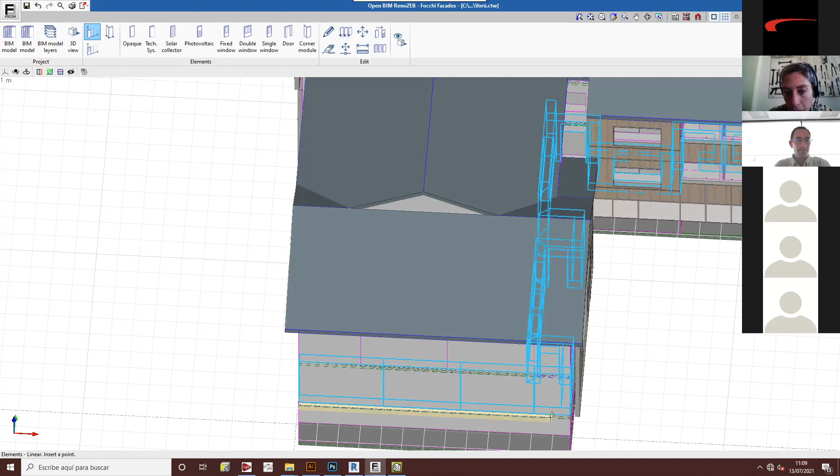And I'm going to use a photovoltaic unit, or let's start with an opaque unit with a timber finish, for example. So I'm going to click here, click here, and create those panels, okay?

This way, for example, same for the photovoltaic unit, by clicking here, let's click here, okay. So I will be introducing these panels.

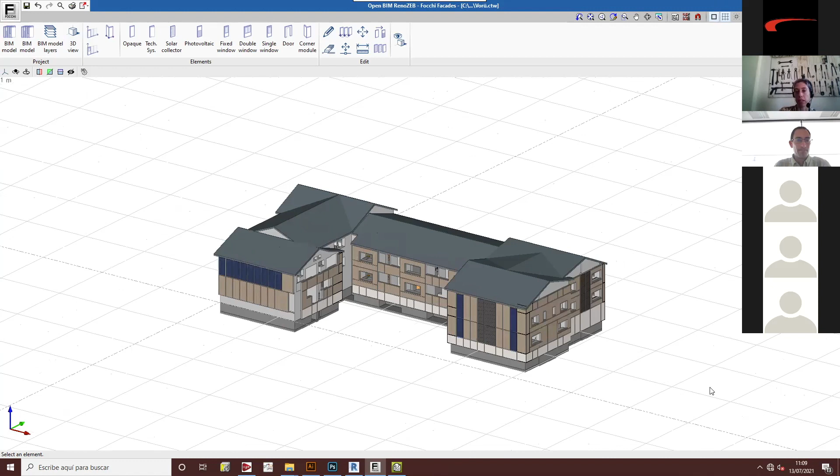The idea is once you have created all this BIM model, you will realize, when Marty shows you the building, that actually the solar panels were only located in those facades, not in all the facades like in this pre-design, because we realized we didn't need it, or the performance of the solar panels and solar collectors was not quite good, so it was not necessary.

But this is a pre-design where afterward you can obtain a list of all the panel descriptions, that you can circulate to Focchi so they can have an idea of this first pre-design. Also, when you export, you export information in this BC3 format that allows you to make this bill of quantities and job control.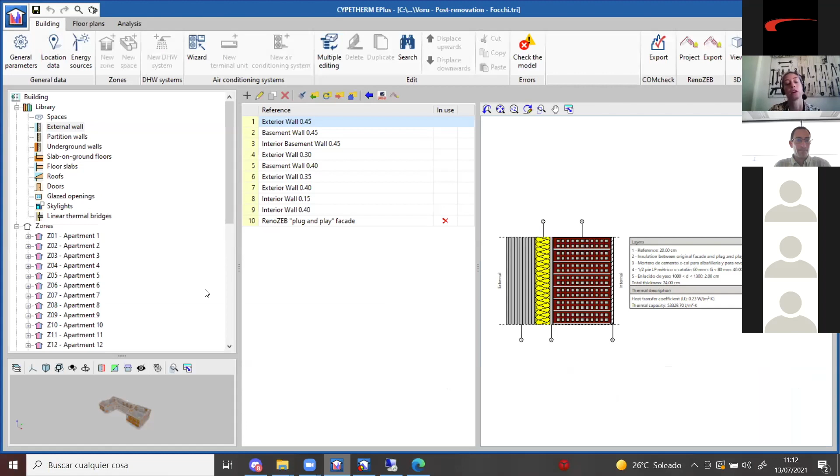Okay, so I will export again, and then I will move to the next software, that is CYPETHERM. In this software, what I'm doing is loading these BIM models and calculating the energy efficiency and CO2 emissions of the building.

This software is also quite simple to use. Here, the program is going to read all the external partitions, underground walls, floor slabs, etc., roofs, glazed openings.

And what I'm going to do here is give them a definition, spaces, etc. We are going to define one by one what each of them is. For example, all the spaces related with bedrooms are occupied spaces, and we will have this ventilation and lighting. You will see all the programs have shortcuts.

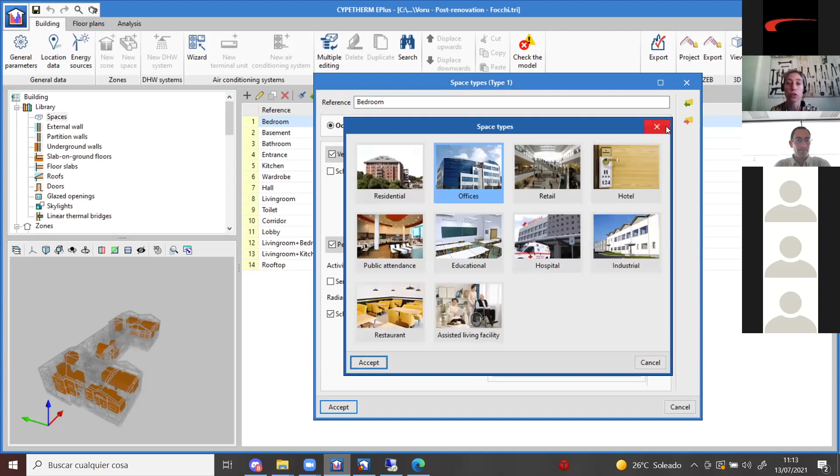So I can say, okay, this is a residential space, load me the information, please. It's going to be the same that is loaded right now, to help with this energy efficiency calculation, but you will also be able to manage all of this information manually.

Another interesting thing about this project is that it provides a catalog. So for the exterior wall, you will be able to go to RenoZEB and load different solutions.

I'm not going to load it now because I have my Focchi facade solution already implemented here, and I don't want to change it. Same for all.

Okay, so you will be defining, for example, for each of the apartments here we have defined a radiator and an HVAC system. And there you will have a really easy way to define all this information, domestic hot water systems, etc.

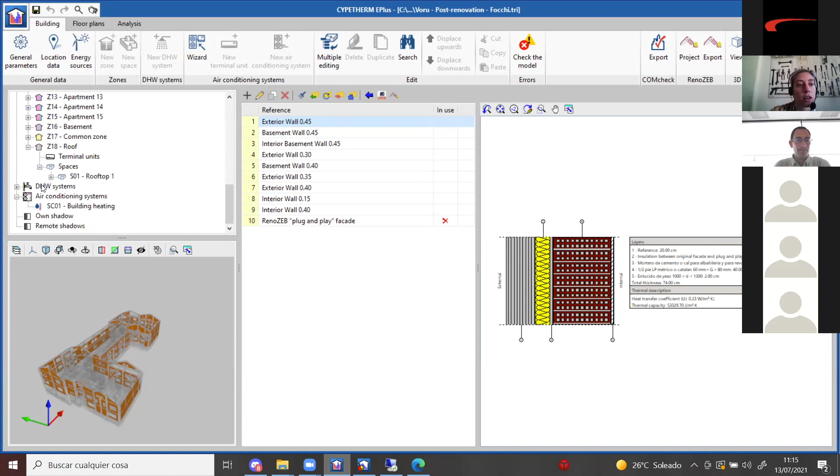After you have done this definition, what we have done is first create a definition for this pre-renovated building without the Focchi facade system that you can see there. Then, after the pre-definition, we have created a definition with the Focchi facade.

And then, for example, I'm going to show you improvements now in CYPETHERM, also adding new HVAC systems or new heating systems. So you can make changes and compare them to see which system performs better, and which makes more sense to change in your renovation and your renovated building.

Okay, here you are going to have the analysis. Sorry, this is a little bit slow loading the analysis. This analysis is for demand and consumption and also CO2 emissions. Just wait a second, because it's generating the reports again.

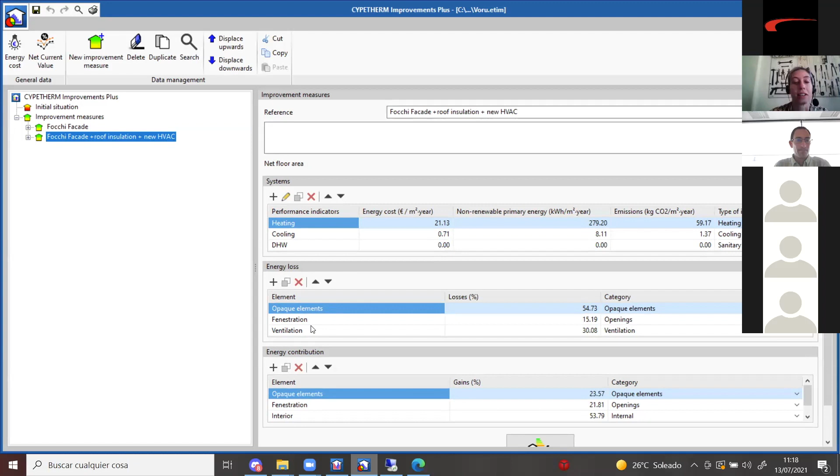Then we have another simulation only with the Focchi facade that actually performs quite well alone. And then we did another simulation with roof insulation and a new HVAC system. Actually, it was not so much sense to change the HVAC system, it made more sense to change the heating systems. As for Estonia, the heating system is quite more important. I realized after doing the simulation that maybe it doesn't make too much sense to change this.

So here you have all the information exported from CYPETHERM. You have heating and energy minimum temperatures apartment by apartment, cooling maximum temperatures, and resources apartment by apartment or space by space. All this information is uploaded to the RenoZEB platform and also to CYPETHERM Improvements Plus.

When you export this information to improvements, you're able to obtain a more simplified list for comparison. You can also add information about the net cost of investment, etc., and obtain the return of investment.

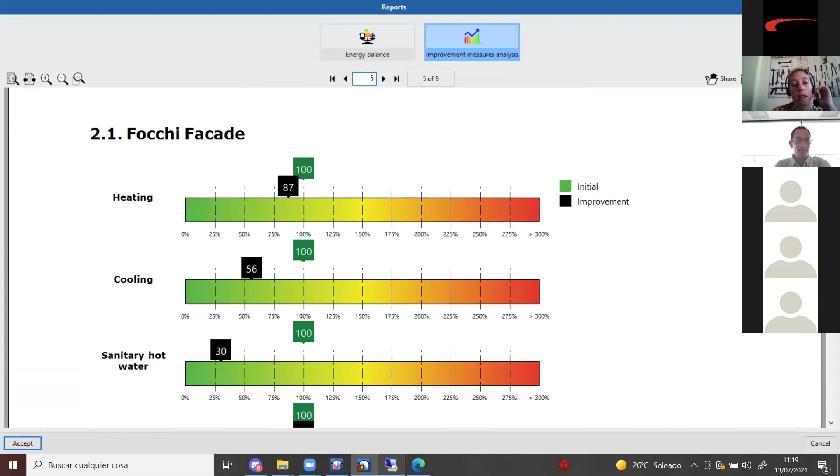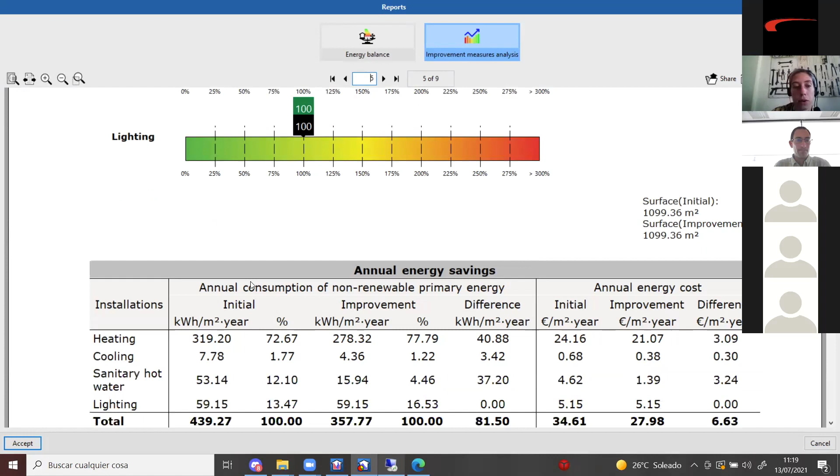As you see, for example, the performance with the Focchi facades is doing really well in the cooling. It's improving the heating and the sanitary hot water. We didn't do anything with the lighting in this case, so it's the same. You can see the performance for each of the systems, the kilowatts per year, and also the CO2 emissions.

And for example, this was another measure that I took, but it was not performing so well. So this is very interesting to see - maybe it's better to change the heating system, and it's not necessary to insulate the roof, because it's under a non-occupied space, so it's not going to change so much the performance of the building.

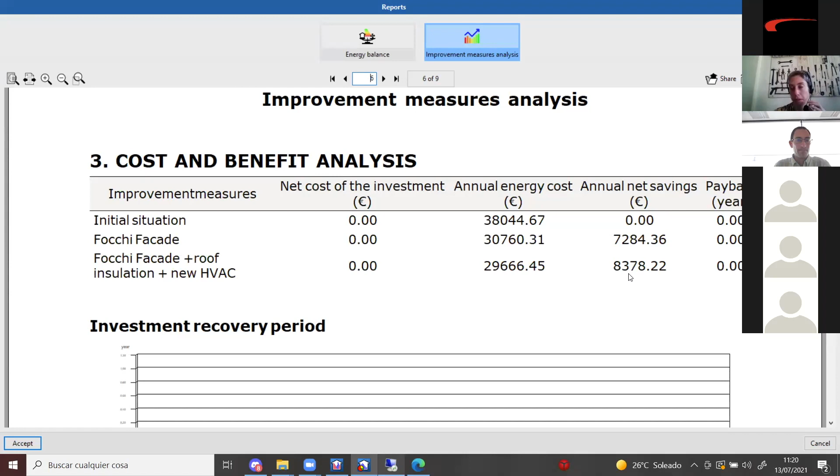Again, just for you to see, as Asier has said - sorry, I didn't want to go to floor plans - well, here is another part of the software.

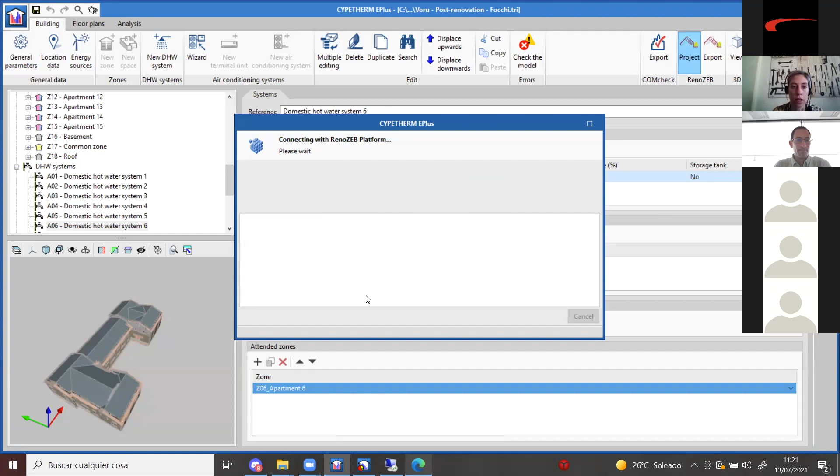Here you have the connection. You see RenoZEB projects, or if you create a user in the RenoZEB platform, you're going to be able to connect to the platform. Now it's calling to the platform, and you can access, for example, the various projects we have, the data, and download the BIM models, etc.

So here you have this direct connection to the platform, also to upload this information to do this comparison in the platform, which I think is quite interesting, because for example, in improvements you cannot see the performance in the 3D model, but the platform is more complete, and it's really interesting to have all this information there, also to download it to complete the project.

And just to finish, because I'm talking a lot, I'm going to show you really quick Arquimedes. As I say, Arquimedes is a more complex program, and we could be here explaining this program for 3 or 4 hours. You're going to be able to find information also online.

But basically, for example, here what we have loaded, really simple, is the BC3s from the Focchi facade, which I say exports from Focchi facade to obtain an estimation of the renovation. This was a pre-design. For example, in the final renovation, you will see that this bottom part doesn't have a panel, neither does this top part or this front part, because we look for the better performance of the building.

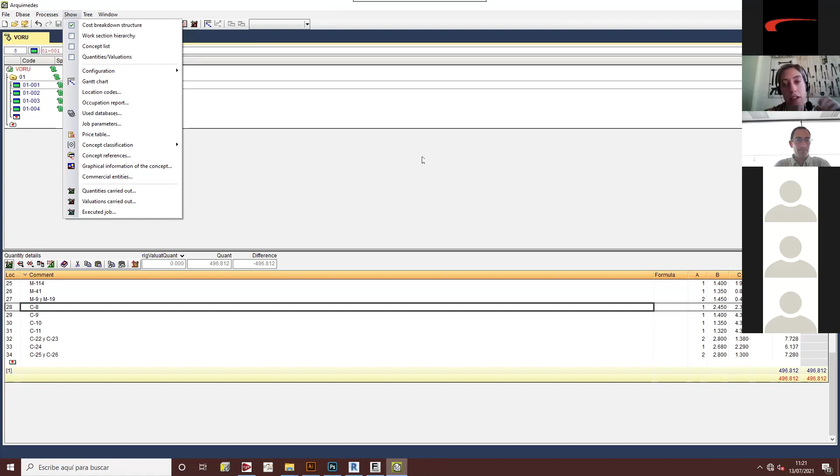And here you're going to be able to create price structures, bill of quantities, construction location codes, for example, for all the part of the construction management. You're going to be able to create a Gantt chart, location codes, etc. This program is really interesting, but I think if you want to go deep on it, maybe it's good to see some tutorials on the internet, because I could go for hours with this.

And thank you very much. I don't know if there are any questions in the chat that I can answer.